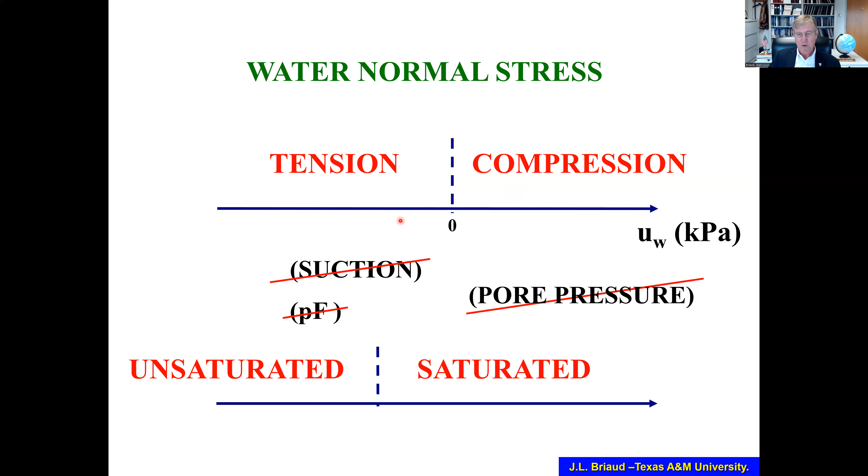So talking about water tension, there are two components, matric water tension and osmotic water tension. You see here a typical experiment with a water container and a small glass tube, and the water rises in the tube because of the fundamental attraction between the water and the silica in the glass, SiO2. And this is the water tension that is generated by this force T that you can see is only

72 millinewton per meter. Newton is about the weight of a small apple. So you can see that 72 millinewton per meter is extremely small, yet this is the force that creates all these unsaturated soil problems that we're facing. If you zoom in at this location here, you can see that the water is pulled up like an old sock that's pulled up in the tiny glass tube.

And so the water under this level here may be at minus 1,000 kilopascal. Yet on the other side, you have atmospheric pressure or zero gauge pressure. So there has to be a membrane between the two worlds of this water tension here and zero pressure here. And that's what is called the contractile skin. So if we draw the profile of water stress, we have compression under the groundwater level, and then you have water tension above the groundwater level. And then here the water is in tension, and you switch to the air on the other side of the membrane.

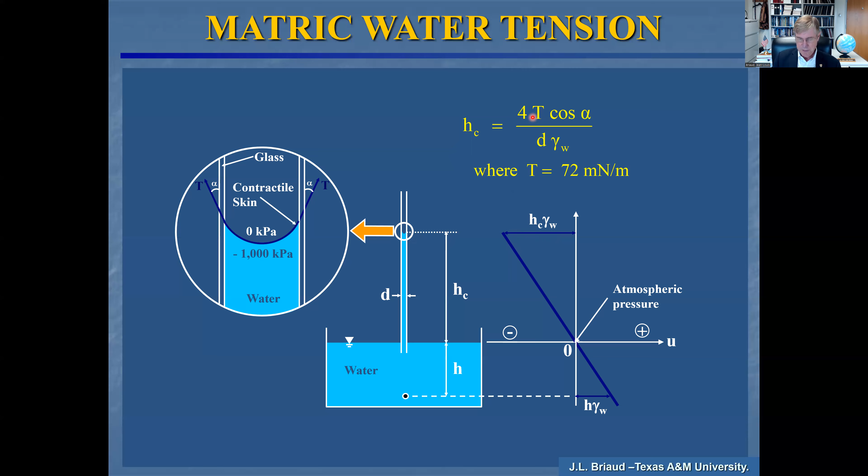And you can, just from the weight of that column of water, find out how high the water can rise in that tiny tube. And that depends on the diameter of the tube, as you can see here, given the force T that acts between the glass and the water molecules. And you can see evidence of this contractile skin, because the water strider is actually making use of that skin and walking on water. You can see the membrane being deflected under the legs of this water strider. As I said, it's only about 72 millinewton per meter.

And you might think, well, it's not very strong. In fact, if you're in the swimming pool and you poke your finger through the water, you don't feel any kind of resistance, because the skin is extremely, extremely thin, a few angstrom. But if you divide that force by the thickness, you get a stress that's of the order of the compressive strength of concrete. So in fact, these van der Waals forces that generate that skin can create tremendous stress, but it's only because it's very thin.

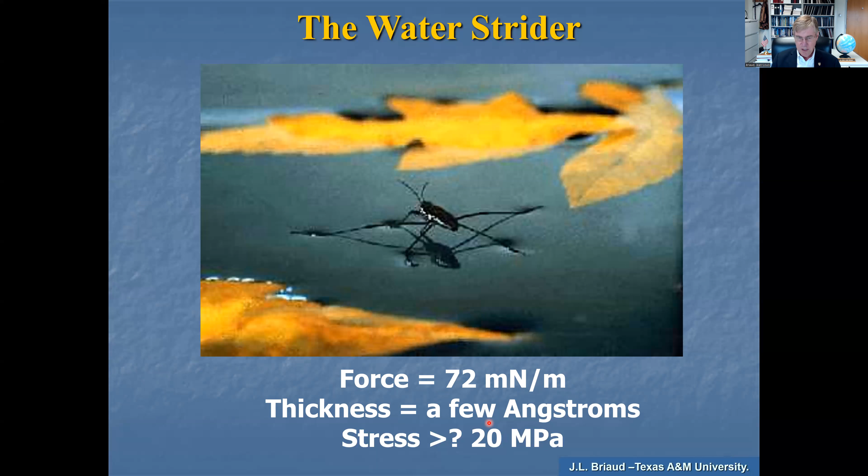And basically, when the water molecules are in the 3D zone of the water mass, the van der Waals forces are attracting the molecules of water to each other. And when it comes to the water surface, the molecules from under are attracting each other, but there's no molecule above because the air is there. So instead of attracting the air, the water is reinforcing the attraction that it develops between the molecules in the horizontal direction. And this increase in attraction is what actually forms the skin.

The other component is the osmotic water tension. And if you can imagine this imaginary experiment where you'd have pure water on one side, salt water on the other side, and this magic membrane here that would let the water go in this direction, but not in that direction, then, if this was salt water and this is pure water, the water would actually move towards the salt water.

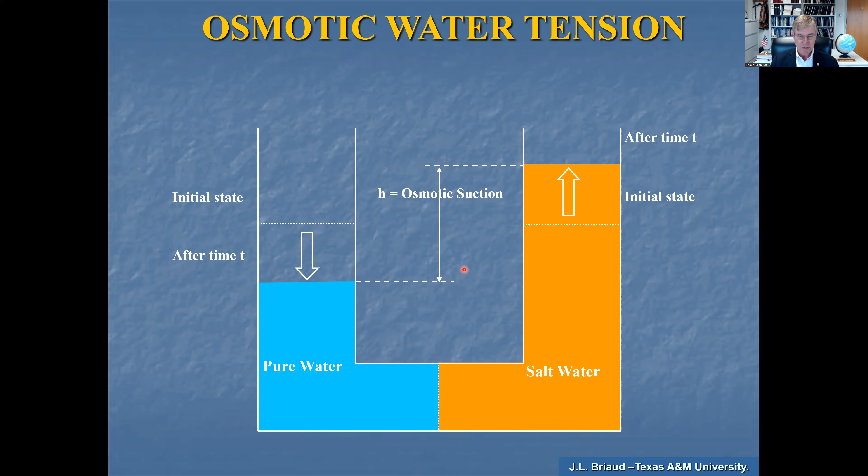And I could never remember as a student which way the water was supposed to go in this osmotic experiment until I realized that if I eat salt, I get thirsty. And so basically the pure water goes towards the salt water. And this difference here creates the water tension due to osmotic suction. And I talked about the water tension due to capillary action. This is probably limited to about 200 kilopascal of water tension. But when you get to extremely small particles like smectite-based particles, then that water tension can actually rise to

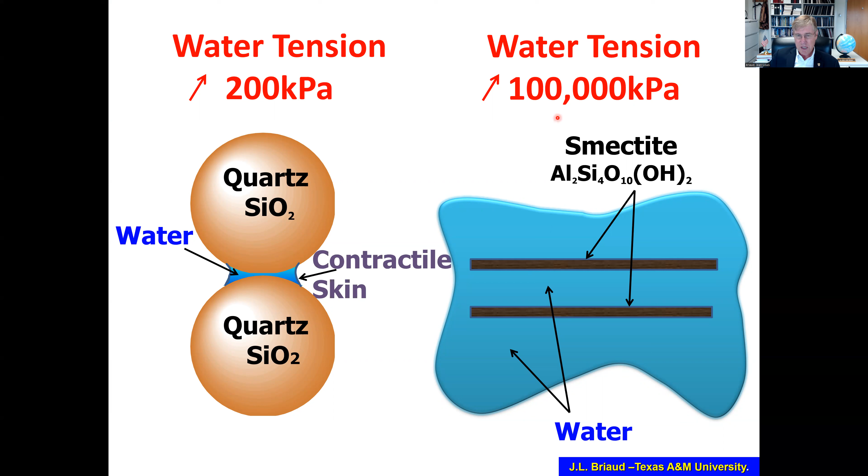100,000 kPa or more. This is an experiment that was done by Mr. Garner. And he sent 3 samples at 3 water contents to 8 laboratories around Texas. And he asked people to give him their measurements of water content and water tension. And you can see sample 1 here, water content. The variation in water content was quite small. That's the green bar that you're looking at. The water tension varied significantly.

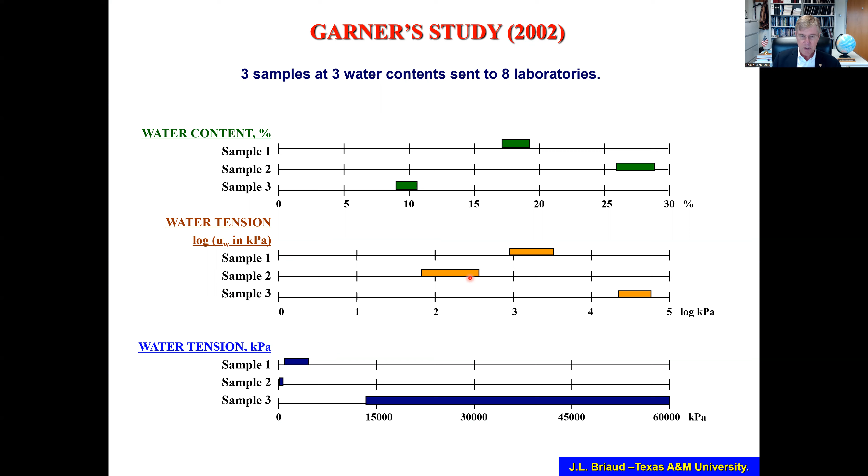Most of the laboratories that measured the water tension separately on the same samples did that by the filter paper method, but you can see that the variation in results was significant for the water tension. If you use the log of the water tension, then the variation decreases. And fortunately, in the theoretical solution, most of the time, it's the log of the water tension that comes into play. So water tension, in a way, is much more sensitive than the water content to the state of the soil. Let's move now to effective stress.

So a long time ago, Terzaghi told us that effective stress was the most important stress in soil mechanics for saturated soils, and that the difference between the total stress and the water stress was the stress that controlled the behavior of these saturated soils. When it comes to unsaturated soils, from a theoretical point of view, like if you want to do numerical simulation, you have to use 2 stress state variables. To form the tensor, you're going to have to identify sigma minus UA, where UA is the air stress, and separately UW minus UA as 2 separate stress state variables.

However, again, going back to saturated soil, 1 stress variable, effective stress, sigma minus UW. In the case of unsaturated soil, so when the degree of saturation is less than 1, in most cases, 1 stress controls the behavior. That's the effective stress. But this time, the effective stress has to be expressed as sigma minus alpha UW, and alpha or chi, you know, that's the old chi factor. Alpha is the water area ratio. And so that's the way to define the effective stress, but it's not really a stress because you have here a soil property. And so you cannot form a valid stress tensor using this definition.

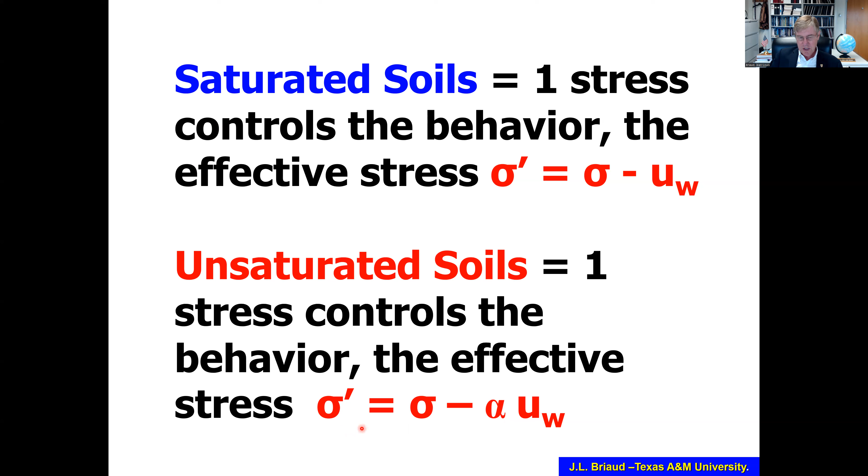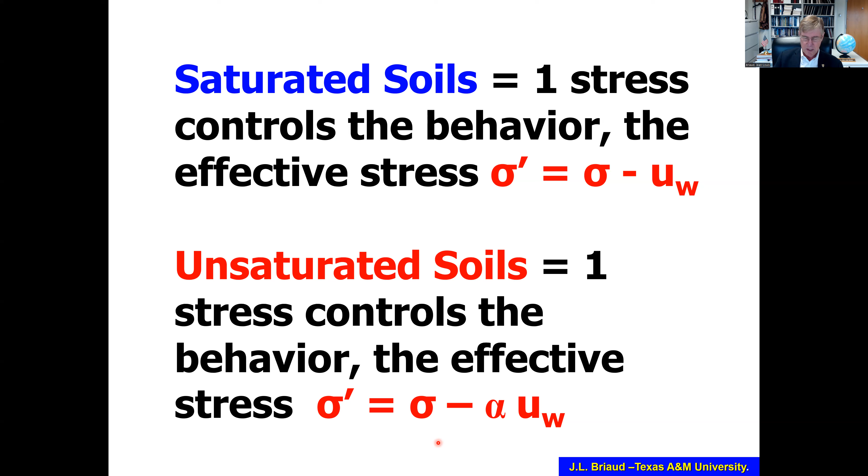So this is more a model, if you wish, but it's a very useful model that can actually help you to determine the strength and deformation of the soil in most cases. Collapsible soil doesn't work well, but in most cases, this stress, this model stress, if you wish, works well.

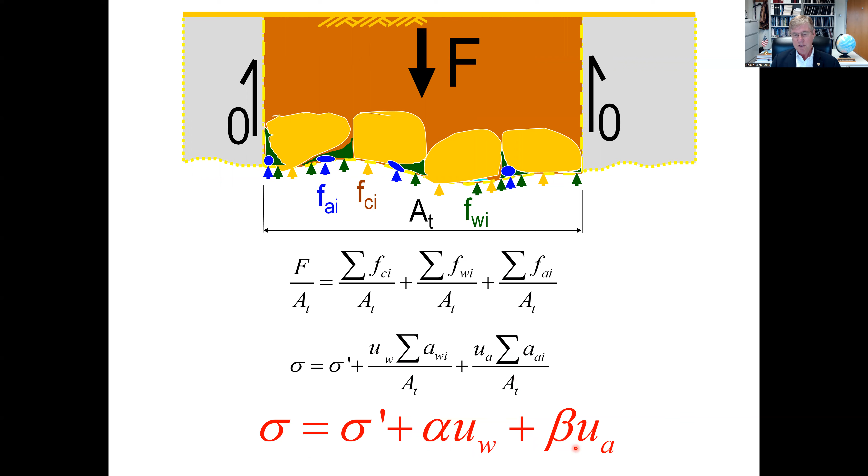Now, that was the general expression, but if you look at most cases in practice in the field, then this is a case where the soil is saturated. You have the soil grain and the water fills all the voids. In this case, UW is different from zero. UA is zero because we don't have any air. And this is the Terzaghi case, sigma prime is sigma minus UW, degree of saturation is 100%.

Then as the soil dries, for example, from the left to the right, the first thing that happens is air bubbles will start to appear. That's the air entry value. And in this case, when we have air bubbles in the liquid phase, then this is occluded air. The air is surrounded by water. And in first approximation, the water and the air stress are equal. And so again, if you look back from the previous slide at the general equation, then you have sigma minus UW again. So when you have occluded air, the effective stress is the same. The liquid phase is more compressible, but the effective stress equation is the same. And typically this occurs when the degree of saturation is larger than about 85%.

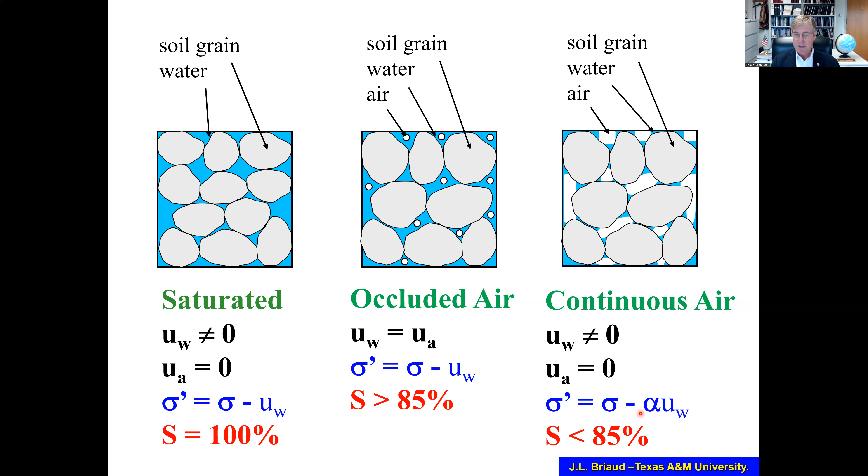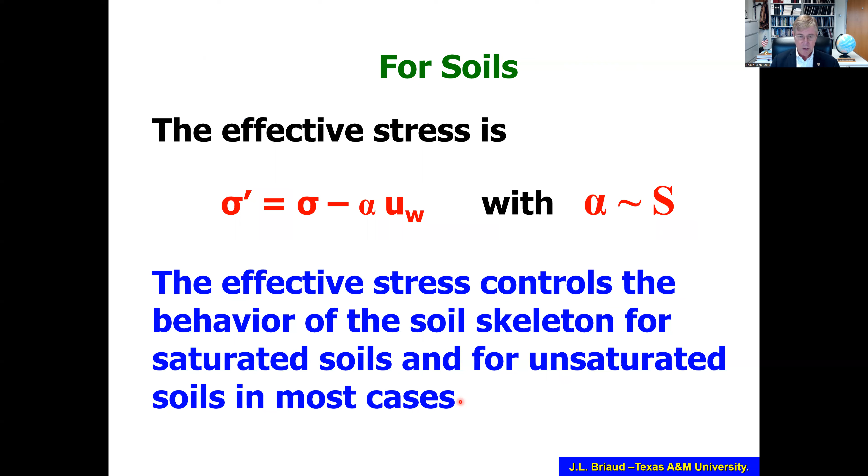Now, if the soil continues to dry, then instead of occluded air, you have a continuous air path to the atmospheric pressure. So therefore, in this case, while the water is going to go into tension, the air pressure is connected to the atmospheric pressure, so it's zero. And in this case, sigma prime is equal to sigma minus alpha UW when the degree of saturation is less than 85%. So in the general case, the expression of this effective stress is the total stress minus alpha UW. And in first approximation, alpha can be taken as the degree of saturation of the material. So the effective stress controls the behavior of the soil skeleton for saturated soils and for unsaturated soil in most cases. Again, as I mentioned, collapsible soils create a special problem for the effective stress.

So let's look at a stress profile. We have a uniform soil here. The water level is about 5 meters deep. We have a capillary zone up to 3 meter depth. And then above this, the soil is unsaturated. The total stress increases at a regular rate. At 7 meters, unit weight being 20, we're at 140. Then the water stress below the groundwater level is going to be positive, or compression. And above the groundwater level, it's going to be in tension. Since this zone is saturated by capillary action, then the stress is simply minus gamma H. And then in the unsaturated zone, the water tension increases more rapidly than the linear variation as you get closer to the ground surface.

The alpha value I simplified here, 0 at the surface and 1 at the top of the capillary zone. Again, think of alpha as being reasonably estimated by the degree of saturation. And then below this capillary zone, the degree of saturation is 1.

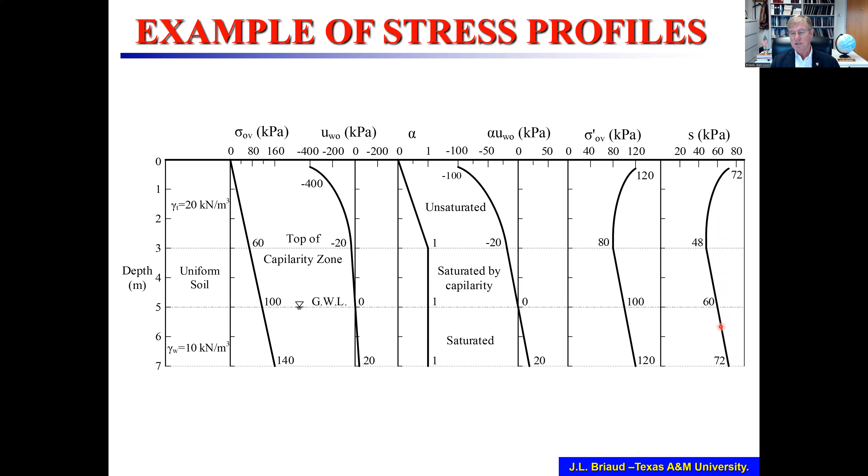And so if we go to a shear strength by multiplying sigma prime 0V by tangent phi, let's say, ignoring any C prime contribution, then we get the strength profile. And you can see that this strength profile is reasonably constant in this case versus depth.

Let's move to strength. So in the case of strength, we plot the shear strength versus the effective stress, but now the effective stress has its expression of sigma minus alpha UW. And when we test unsaturated soil in practice, typically we're plotting this versus total stress.

And that's going to create some problems because if a soil is unsaturated, because of the water tension, it's going to create a significant amount of strength. And you're going to have a C value, if you plot against total stress, that is going to include the apparent cohesion due to the increase in effective stress relying on the water tension times tangent phi. So you see the C apparent here is due to this component on the strength.

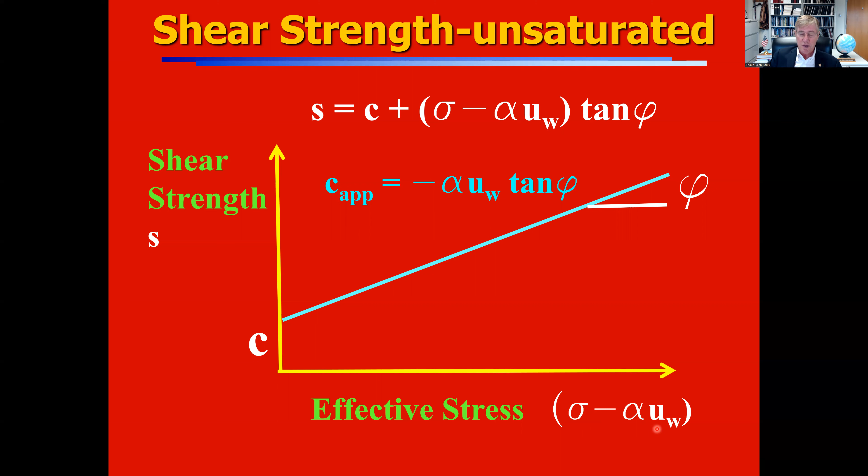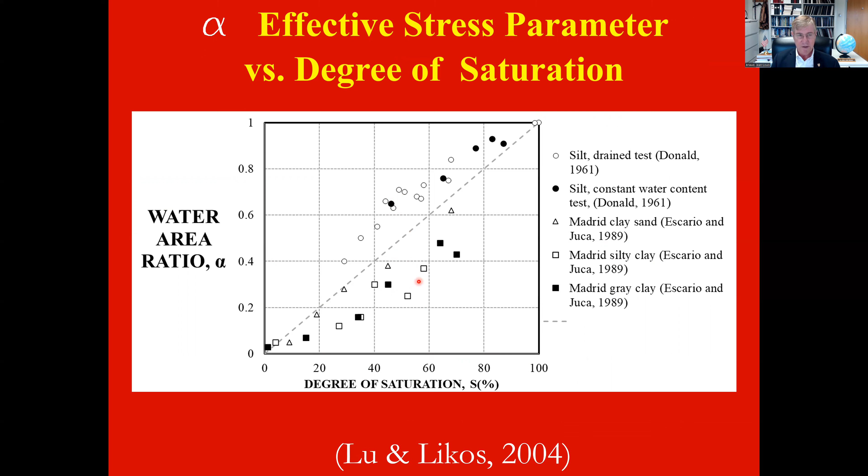So it's important to try to plot it, and it's not easy because you have to evaluate alpha through the degree of saturation, for example, and then you also have to get a value of the water tension. That's what I was telling you here, alpha effective stress parameter versus degree of saturation using data from several investigators. And you can see that alpha versus degree of saturation, there's quite a bit of scatter. So you're looking at plus or minus 30% or so in terms of precision of this rule of thumb.

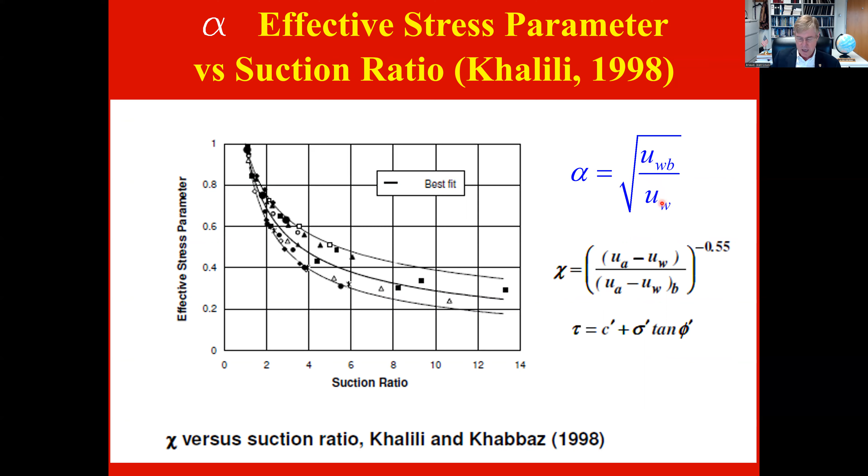Khalili in Australia suggested another relationship between the effective stress parameter alpha and the suction ratio. I simplified it. Here's his expression: the square root of the air entry value for the water tension divided by the actual water tension. So let's look, for example, at an unconfined compression test on unsaturated soil.

And if you can use that equation, and if you take a simple case of C equals 0, phi equals 30 degrees, then QU, the unconfined compression strength of that unsaturated soil, becomes equal to minus 2 UW, the water tension, times the degree of saturation.

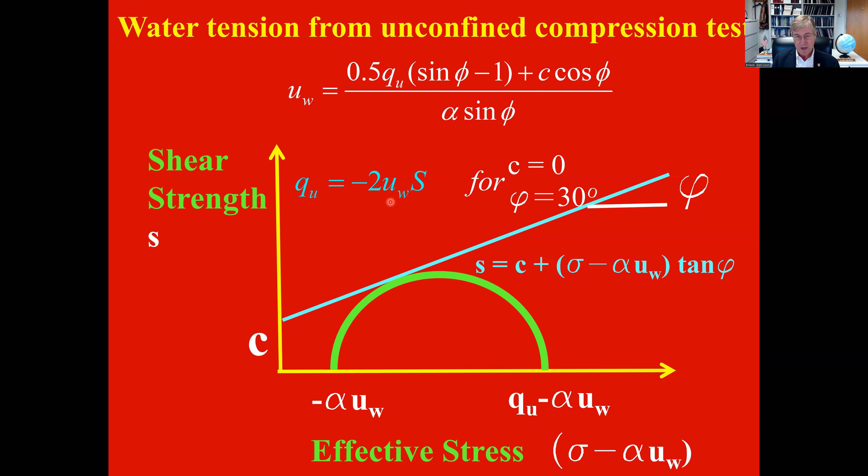So essentially, when we do an unconfined compression test, unsaturated or saturated, the water is in tension. When you extrude it, even a sample that comes from below the water table, when you bring it back to the lab, you extrude it, the water is in tension. The total stress is released, the soil is trying to expand, and it develops water tension. And so essentially, the unconfined compression test, if you don't have a serious component of true C prime, you're measuring the effect of the water tension on that sample.

Comparing saturated and unsaturated strength. If I take C prime equals 5, Phi prime 30 degrees, and I go down to a depth of 1 meter below the ground surface. If the soil is saturated and the water pressure is 10 kPa, let's say UA is 0, then I get a strength of about 11 kilopascal.

If the soil becomes unsaturated with the same C prime and Phi prime, the same depth, and say the degree of saturation has dropped to 55%, now the water tension is at minus 250 kPa, UA is still 0, because we have a continuous air path to the atmospheric pressure. The calculations show 73 kilopascal. So the strength increases dramatically when the material becomes unsaturated.

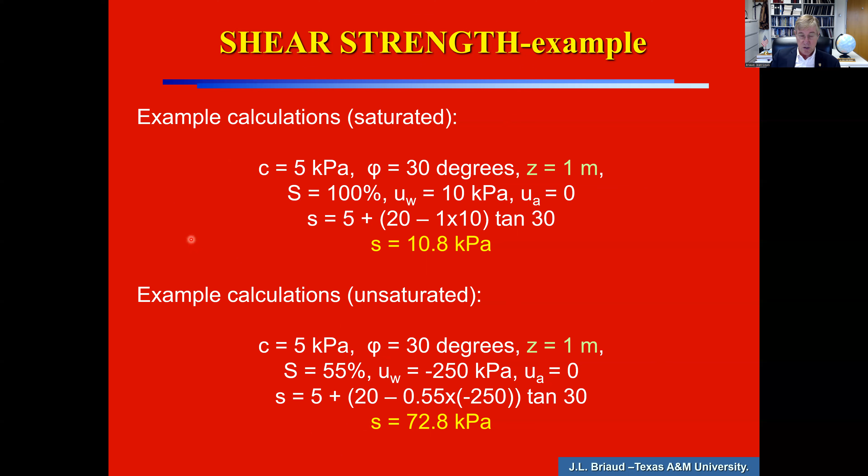And that has an impact when you make measurements, or when you take samples in the summer or in the winter. If there is a significant variation in the water tension or even groundwater level, then the strength is going to be significantly different.

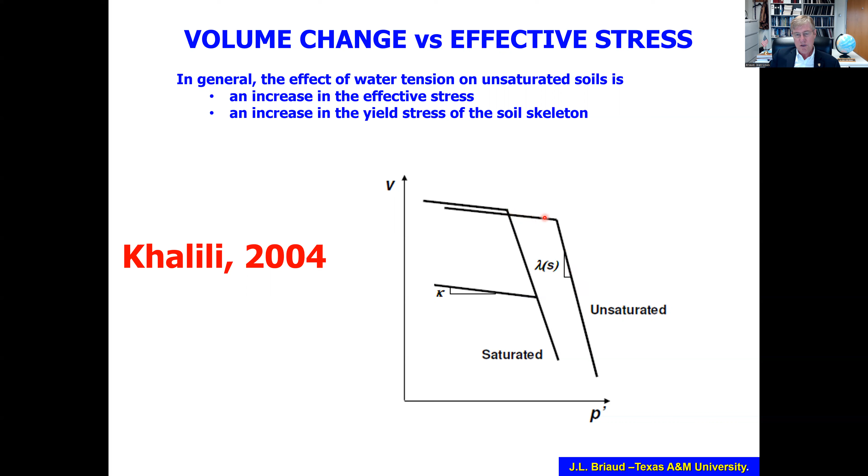One last topic, deformation. When you look at volume change versus effective stress, in general, the effect of water tension is an increase in the effective stress and an increase in the yield stress of the soil skeleton. This is, if you wish, a typical result of a consolidation test. This one would be saturated, this one would be unsaturated. So the yield stress, or pre-consolidation pressure, is increasing. But I found that this model is extremely useful to calculate volume change.

This is a porcelain clay, and you're looking at water content versus relative change in volume. So this is the zero volume change. That's the soil as it is collected from the field, and the initial water content, in this case, is about 25%. This is a free shrink test. The material shrinks on the lab table, decreasing in water content and volume, and then when the particles are touching each other you can still lose water, but you cannot lose volume, and the model goes straight down when you hit the shrinkage limit.

On the other side, if you manage to do an inundation test, a swell test, then the water content will increase, the volume will increase, and it will stop at the swell limit. The difference between the swell limit defined in this fashion and the shrinkage limit for this porcelain clay was about 24%. If you look at the bentonite clay here, things are quite different, but still that line where the soil is saturated is linear, and the slope is about 0.81. For that bentonite clay, the shrinkage limit is about 20%, and this is not pure bentonite. It's a mixture of 20% bentonite and 80% porcelain clay kaolinite. And the swell limit is at 75%.

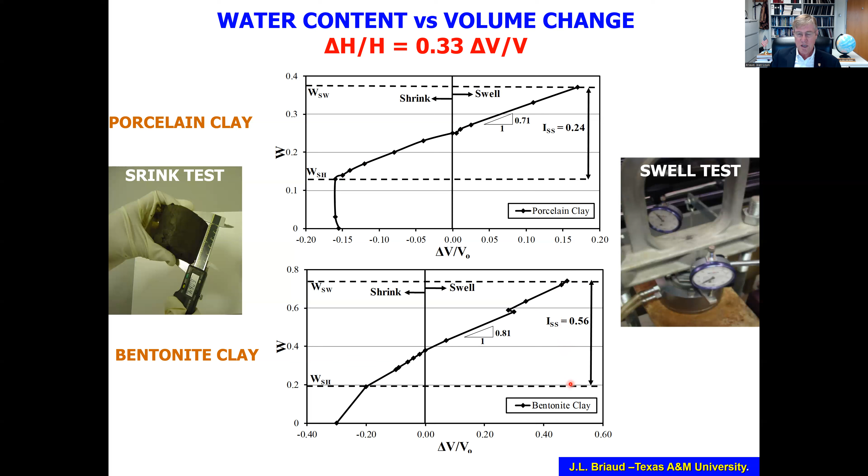We call this the shrink swell index. The amplitude is, in this case, 56%. If you look on the left-hand side here, this is water content versus relative change in volume, and I simplified the model by a vertical line up to the shrinkage limit, and then another line all the way to the swell limit. And again, this is one of the most linear things I've ever found in soil. Turns out that the slope links the water content, which is associated with the water tension through the water retention curve. So if you wish, the water content plays the role of a stress, and this is the volumetric strain. So this is a stress strain curve, and this is a linear stress strain curve.

So you could think of the slope of this as a modulus, but this modulus is pretty constant, actually, because it's the unit weight of water divided by the dry unit weight. So 0.81, as in the previous slide. If you're in gravel, you're not going to have any swelling or swell pressure. The line will be vertical. If you're in silty sand, then there will be a beginning of a swelling process. If you're in clay with low plasticity, then this swelling line will increase. And if you're in high plasticity clay, then you will have a much longer part to this. That's what I was showing previously. For the kaolinite, we were at 24%, and for the bentonite, we were at 56%.

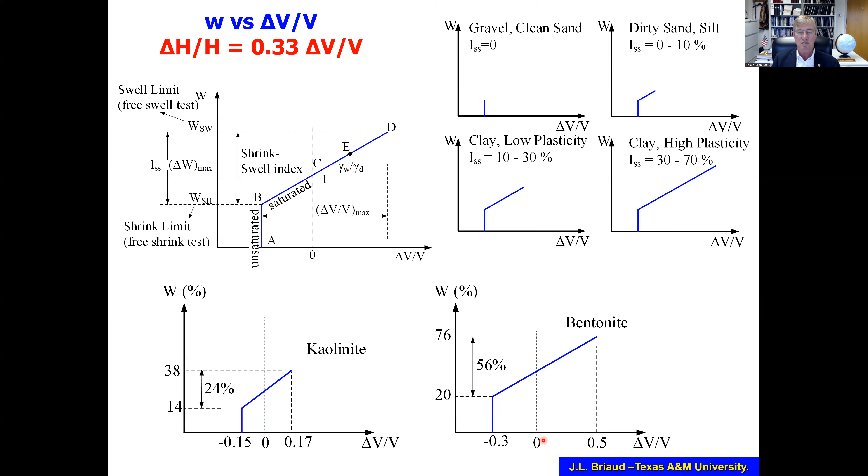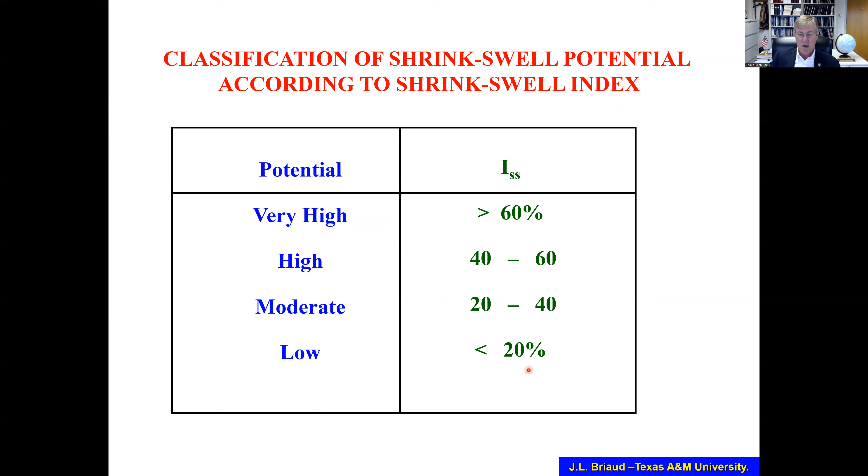So if you can obtain the change in water content under a structure during the seasonal variation, then you can infer the volume change and therefore the movement associated with this change in water content. So we use this shrink swell index, the difference between the swell limit and the shrinkage limit, as a way to gauge what the potential for shrinking and swelling is, from larger than 60% all the way down to less than 20%.

So this concludes the fundamentals review, the background overview that I wanted to do. And the next part will be the applications of these fundamentals to how this will impact our practice.